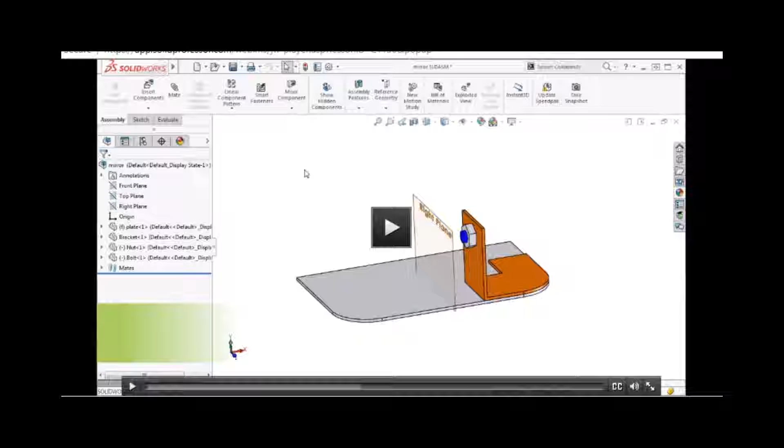When you design symmetric assemblies, mirroring components can help you save time and capture design intent. SolidWorks also makes it easy to add left and right-hand versions of mirrored components.

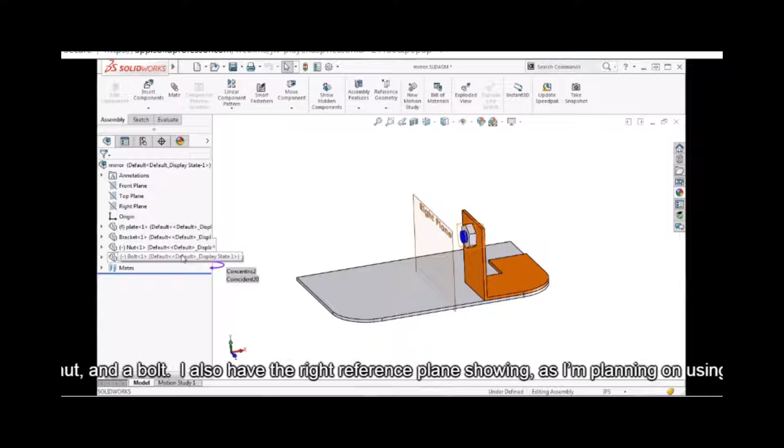Here I have a simple assembly consisting of 4 components: a plate, a bracket, a nut, and a bolt. I also have the right reference plane showing, as I'm planning on using this as the mirror plane. I'd like to copy the bracket, nut, and bolt to the other side of the plate.

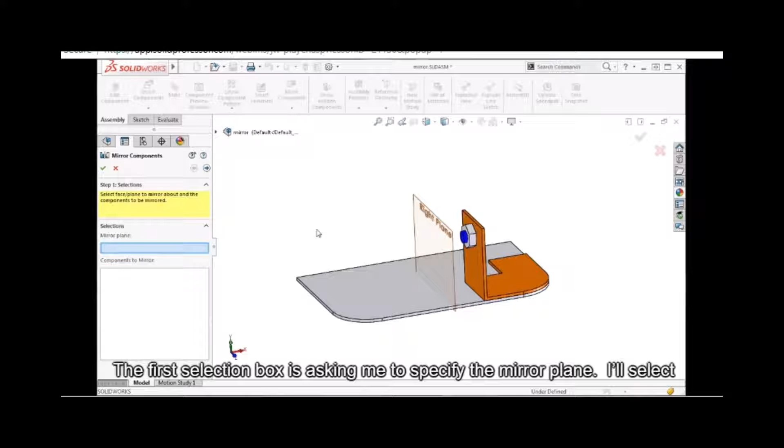I'll begin by launching the Mirror Components tool from the Assembly toolbar. This is the Mirror Components Property Manager. The first selection box is asking me to specify the mirror plane. I'll select the right reference plane, but keep in mind you don't have to use one of the 3 default reference planes. You could use any plane or flat face in the assembly.

Next, SolidWorks asks me which components I'd like to mirror. I'll select the bracket, nut, and bolt in the graphics area, and you can see they've been added to the list in the Property Manager. I'll click the next arrow to move on.

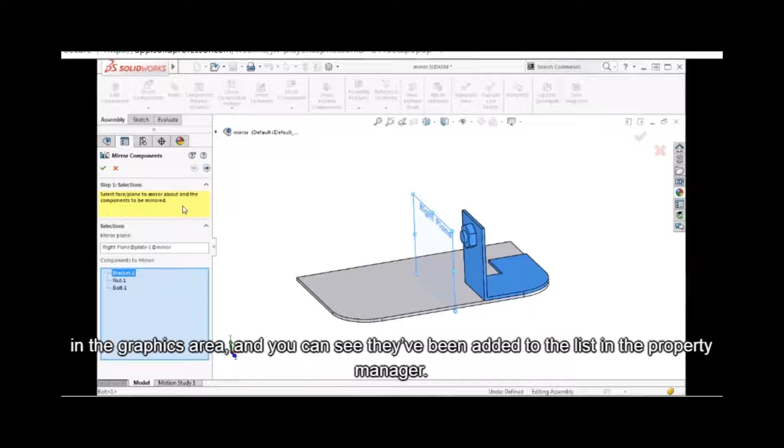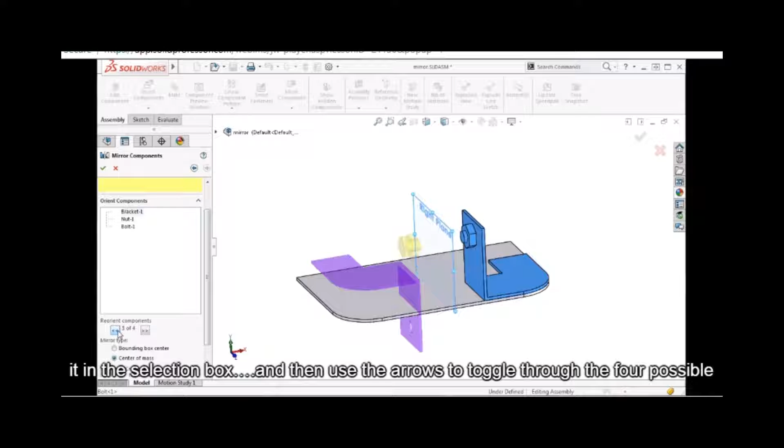The next step here is to orient the mirrored components. You can see from the preview in the graphics area, if I were to simply click the green check and finish the command now, the bracket would not be properly aligned with the plate. So to orient a component, I'll first highlight it in the selection box, then use the arrows to toggle through the 4 possible orientations. The mirror type lets me choose how to mirror the component.

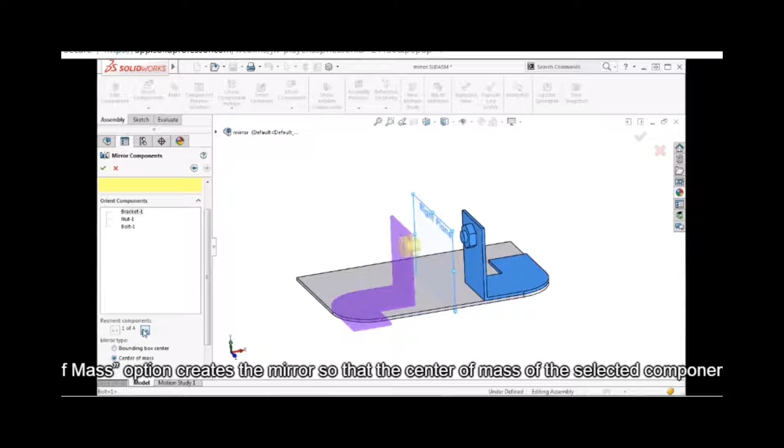Generally speaking, using a bounding box works better for asymmetric components. The bounding box option positions the mirror so that the center of a bounding box for the selected component is mirrored about the mirror plane, whereas the center of mass option creates the mirror so that the center of mass of the selected component is mirrored about the mirror plane.

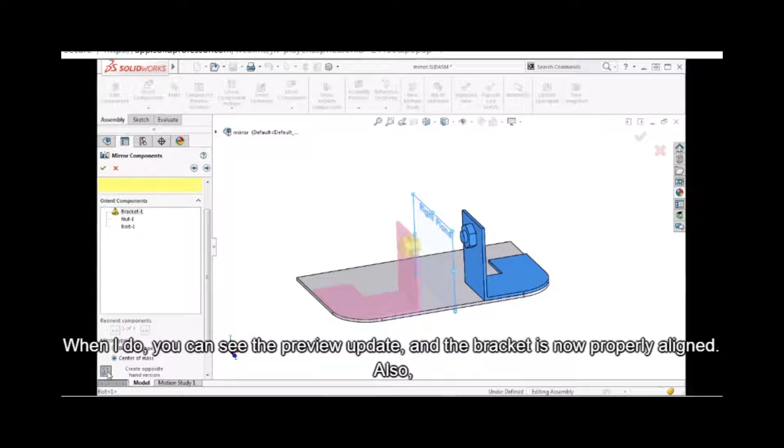You can see from the preview that regardless of the mirror type, none of these possible orientations correctly aligns the bracket with the plate. This is because we need to create an opposite hand version of the bracket. To do this, I'll click the Create Opposite Hand Version icon. When I do, you can see the preview update, and the bracket is now properly aligned.

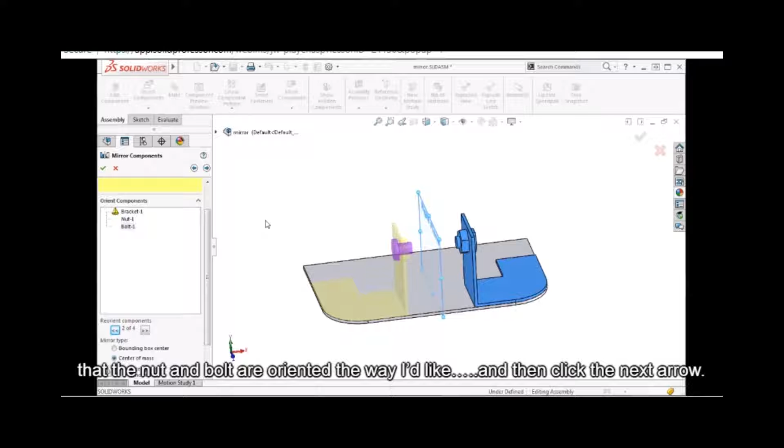Also, notice that a mirror icon appears next to the bracket in the Property Manager, indicating that I'm creating an opposite hand version for this part. I'll quickly make sure the nut and bolt are oriented the way I'd like, and then click the next arrow.

Here in this final step, SolidWorks is asking how we'd like to store the opposite hand version of the bracket. There are 2 options. We can either create a derived configuration that's stored with our original bracket file, or create a new part file for the mirrored bracket.

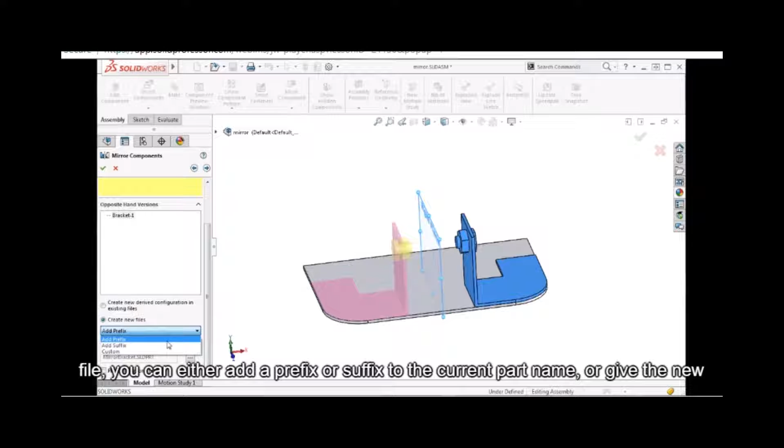If you choose to create a new part file, you can either add a prefix or suffix to the current part name, or give the new part a custom name. You can also choose whether you'd like the new part file to be saved in the same folder as the original file by enabling the Place Files in One Folder checkbox.

Instead of creating a new file, I'll choose the Derived Configuration option and click the green check to finish the mirror command.

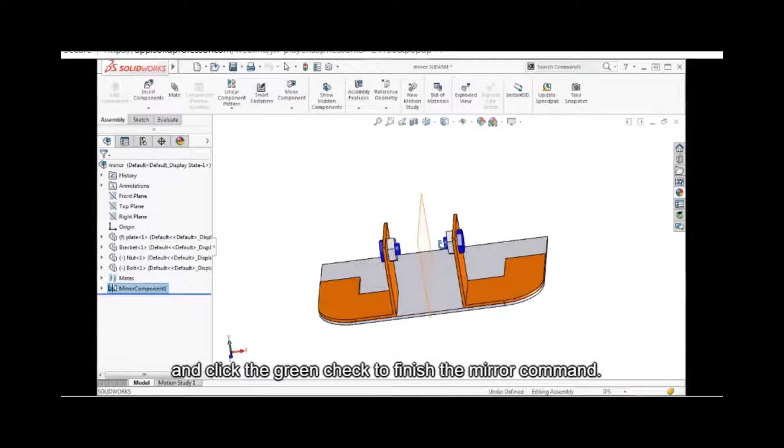Notice that a mirror component icon now appears in the FeatureManager design tree. If you need to make any changes to the orientation of the mirrored components, or add additional components to the mirror feature, you can do this by clicking on the mirror component icon and selecting Edit Feature.

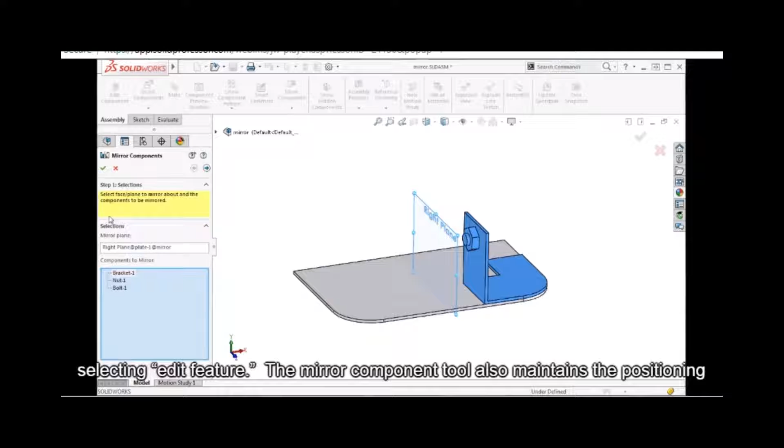The Mirror Component tool also maintains the positioning of the mirrored components, as well as mirroring any mates. Notice if I delete one of the mates used to position the original bracket, when I move the bracket, its mirrored component repositions as well.

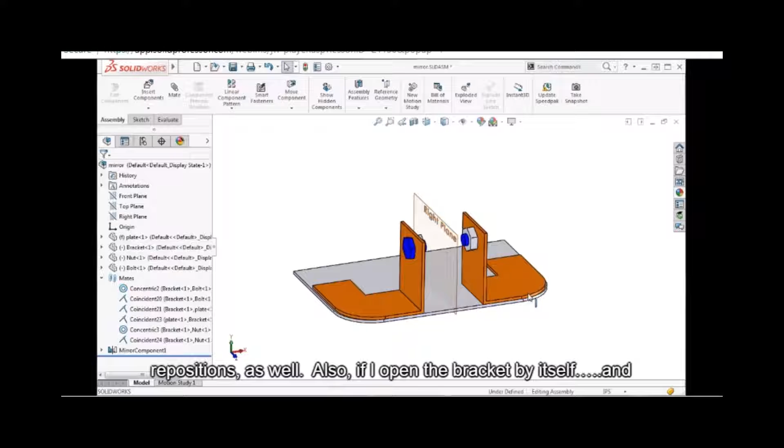Also, if I open the bracket by itself and switch to the Configuration Manager tree, you can see that the mirrored configuration has been created and added to the bracket part.